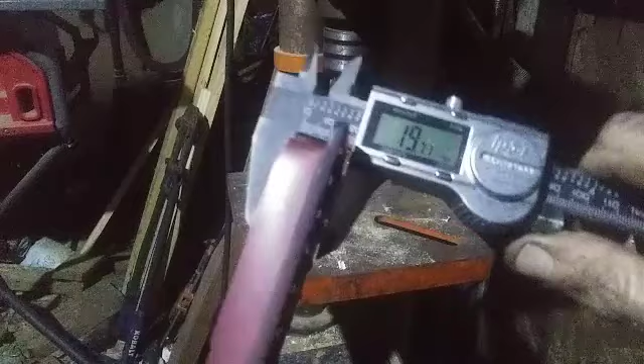So you go like this, and that gets you the thickness with the frets. And we're reading 19.71 right there. And then you go like this. See, I'm not on the frets now. And that gets you the thickness without the frets, and that's 19.67. Those are probably not real accurate measurements. You want to take real accurate measurements.

But let's say you're going to add 1 mil for the frets. If you're shooting for a 20 mil thick neck, then all you need to do is put your bit in. Pretend this is the other bit. You stick your bit in, then you measure from the bottom of the bit down to your plate here, and set it for 21 mil. And you just turn on the drill press and run this thing back and forth underneath it until you've done this. You don't need the sled.

And then you take that bit out, you put this bit in, the 45 bevel bit, you adjust it so... tired of stooping over for this camera. Alright, yeah. So you take it and you adjust it so

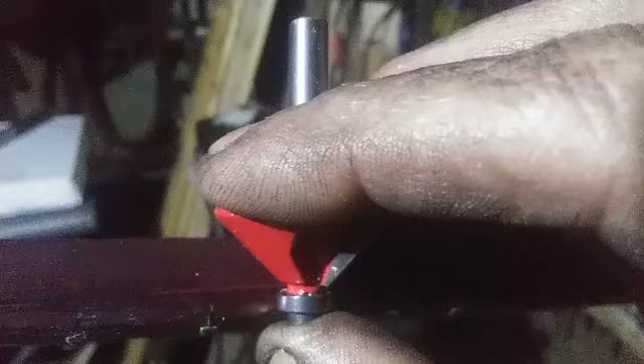the top of the bearing is right at the line there, and you might actually need to move it down a little bit, but someplace right about there is going to be the proper depth adjustment to get this thing to ride on the edge of the fingerboard and get you a 45 bevel cut along the back of the neck between the heel and the nut, and shape all this for you basically. Probably good enough to be ready to sand.

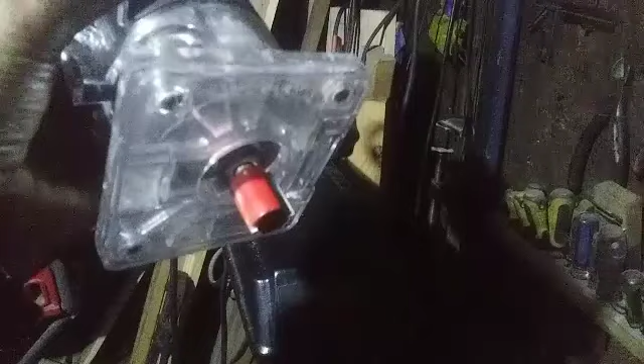So yeah, you would start by running it through the drill press with one of these kind of guys in order to thickness it, and then you'd run it through the drill press with one of these kind of guys in order to profile it. And so I'm going to try that next.

Okay, I've marked out the neck with the spine all the way down, and the triangular heel, and where the screw hole should be, as opposed to where they used to be on the X-5, which is like 3 years ago, before I came up with any kind of standards. And so now we can actually see if the light is going to behave.

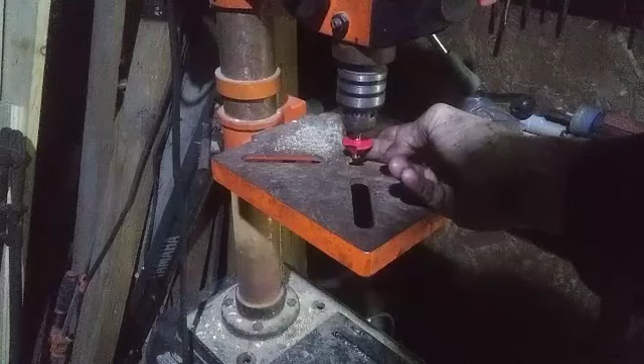Yeah, now we can actually see where there's still material to be removed. And as you can see, there's a fair amount in here at the shoulder areas still. So, but I've also set up the drill press here with the 45 bevel router bit, following router bit with the little bearing on the bottom.

And I've already adjusted the table height and locked it down to follow right along the edge of the fretboard with the bearing, and to start cutting just above the edge of the fretboard or right at the edge of the fretboard. That's the tricky part, because see, if you tilt or wiggle this thing a little bit while you're doing this, then if you tilt it like that way, you're actually going to start cutting into the bottom edge of the fretboard a little bit probably. So you got to be careful and slow with this process probably.

But just kind of sliding it along with the power off as a dry run test to check it out, it looks like it'll be, I don't know, somewhere down here before it really starts to actually have any effect, I think. So, but I'm going to give this a shot. And I think I already mentioned this in a previous clip, but if you take this bit and use it instead of that and adjust the table to the proper height, you don't even need this thing.

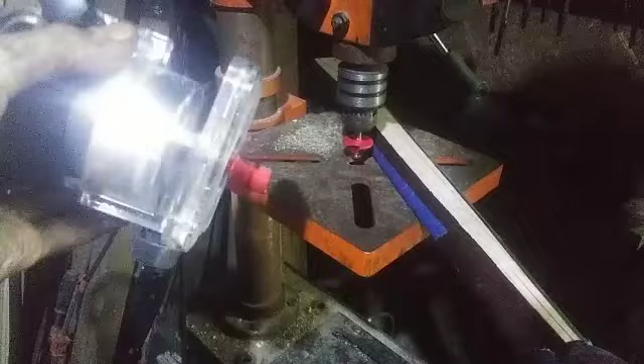So yeah, I would have to say that going forward, using the drill press and using a bit like this, they make nice big ones that you'd be able to do a whole neck in like one pass kind of thing. Use a bit like that in order to thin it down to 20, and then use a bit like this in order to get the profile. Might be the way to go. We'll see how this goes.

All I gotta do is, I've got this plugged into the generator. All the big gear gets plugged into the generator and run off the generator. Always, they drain batteries way too fast. Induction motors. So yeah, let me go fire up the generator and we'll see what happens.

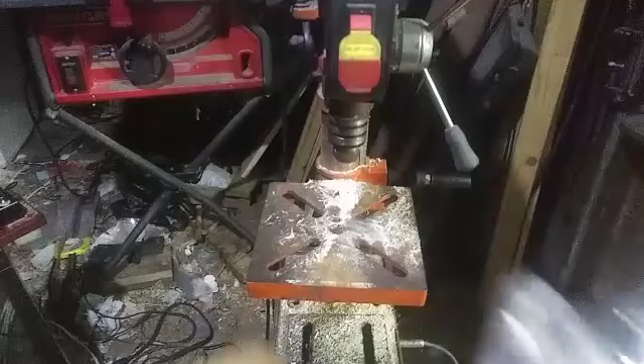Well, I think I'd have to say that it works, but it's not really fast or easy, and also this isn't 45. These cuts are 45-degree angle, but the angle, if you go from here to here, is not 45 degrees. It's something less than 45. So in a router bit, you would need something like a 60-degree router bit, maybe. You'd have to do part of it. Up here, that's where the neck is actually 45. And then here, it requires a larger angle router bit, 60, something like that, maybe, the rest of the way.

So, yeah, looks like angle grinder and a 40 grit flapper disc, sanding disc, is going to be the way to shape this thing, I'd say. And you just go from about here down to maybe there, and that's it. So yeah, at this point, this thing only needs like one swipe right here and a couple swipes right in there and there, and it's ready to go for shaping with the Shinto rasp.

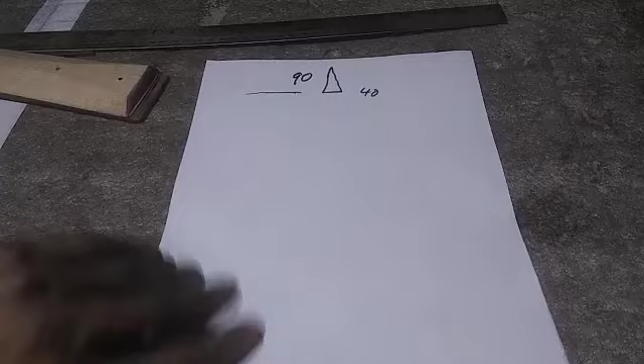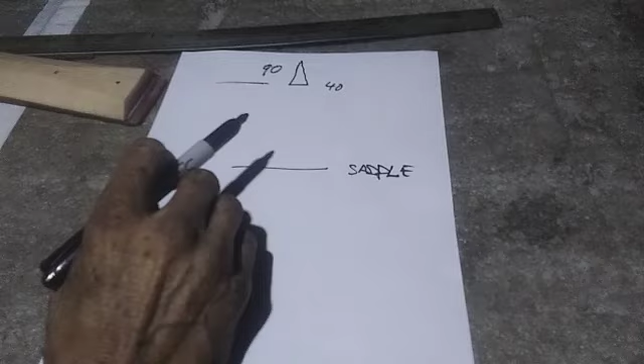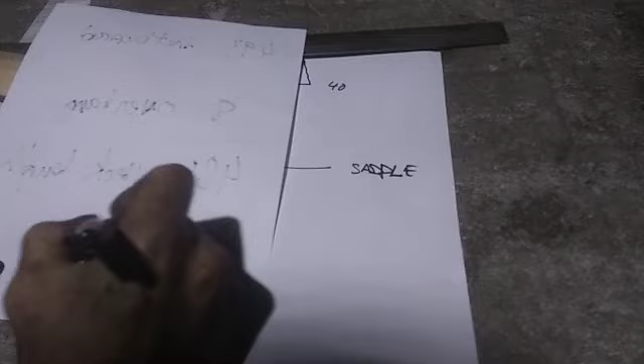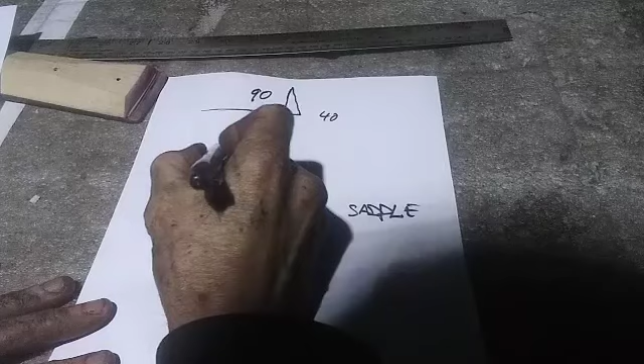So here's our triangular heel, and it's going to be 40 wide and 90 long. And this is where the end of the neck is. So down here is going to be our saddle line. And the saddle, it's a Fender scale length, so we're 648 from the nut all the way up here to the saddle line. And we know that the neck down to here is 485 already. So 648 minus 485. You crunch that on a calculator or whatever. And survey says this distance is 163, from the end of the neck to the saddle line.

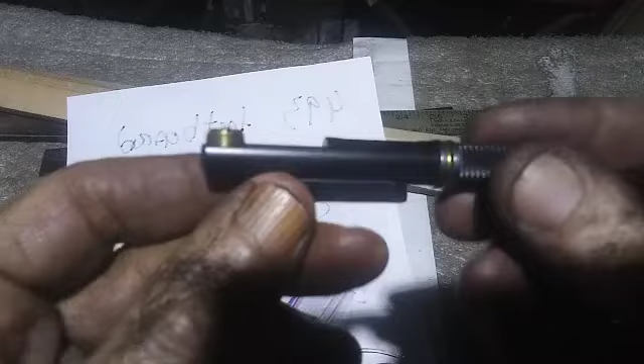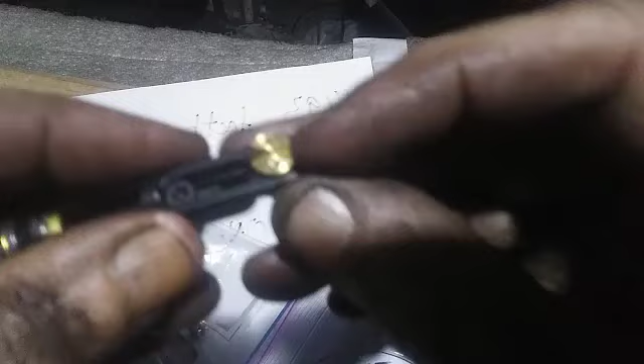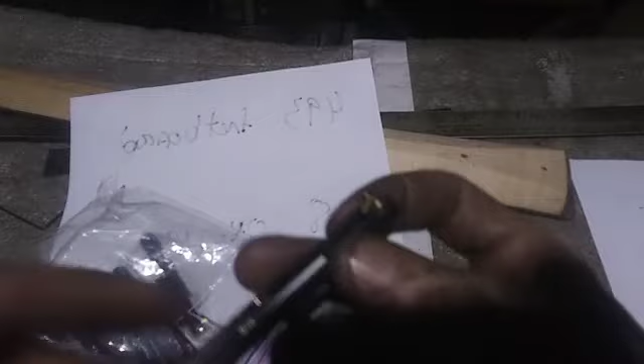So, taking a look at a barrel tuner here, I was thinking this actually screwed in and you would rotate it in order to adjust the height up and down, but it's got a lock grub screw there, and it's not threaded, it's just a post. And it actually has little miniature grub screws here to raise and lower it like it was a Fender saddle, with a little Allen. So that's how you get your height adjustment on the saddles. And this one down here unlocks it from the base so it'll slide back and forth for your intonation. And it's currently in the all-way forward position.

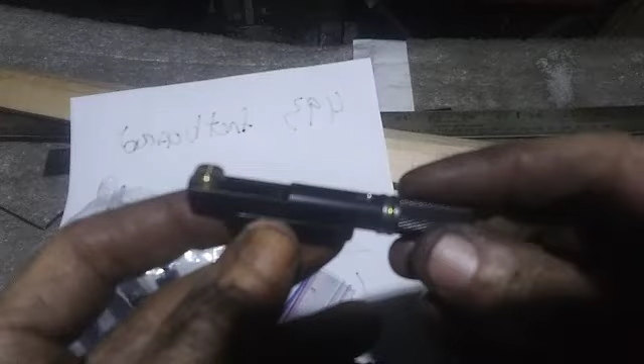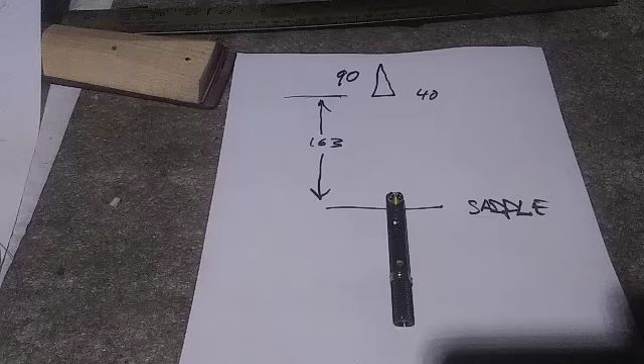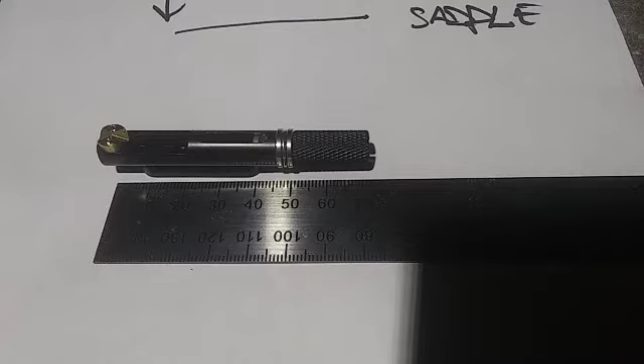And looking at the saddle in general, if this is your saddle line right here, and you start with your guys all the way forward, then you're going to need wood back enough to mount these two holes on the base. So I'm thinking from the saddle line, you want wood back to about where the knobs start. So we're looking at something kind of like this. Here would be our saddle line, and there's our saddle. And so our wood's going to extend from the saddle line back to there. Let's get a measurement. Survey says 50 millimeters. So we're going to come down another 50, which would be about a third of this. And that'll be the end of the guitar.

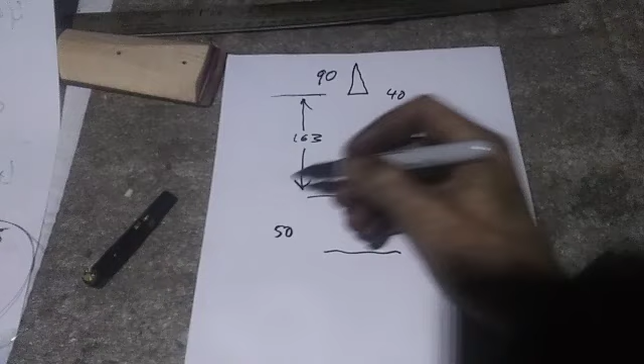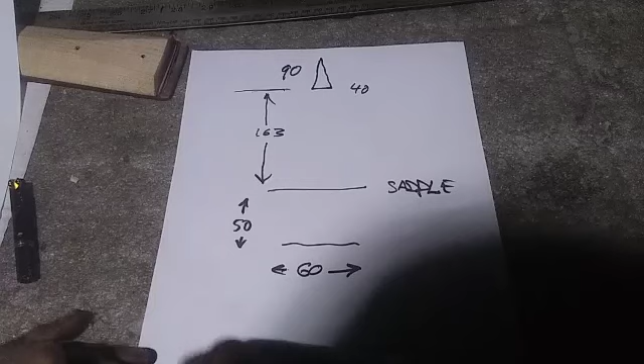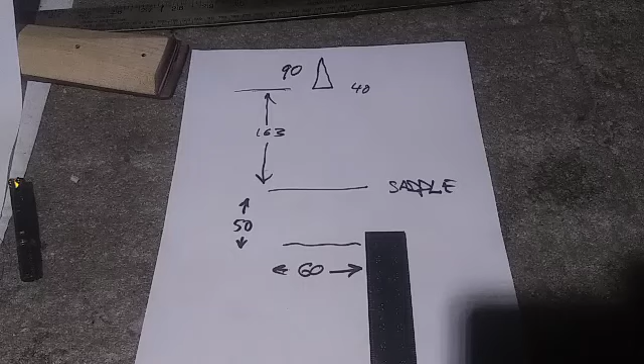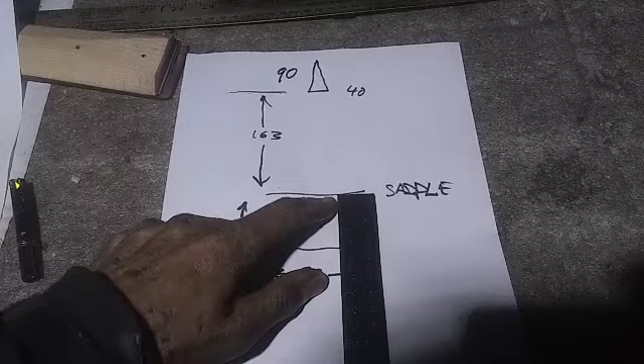And these things are designed for 10 millimeter spacing. So our bridge, quote unquote, will be 60 millimeters wide. So we need 60 wide for the saddles down here. Okay, and then you're going to need the bar down on the right side that lets you mount the EQ and the control panel, and also serves as the right hand portion of the leg cutout, you might say. This bar down here and then the swing bar form the leg cutout. And on an X-13, the length of this bar here is 200 millimeters from the saddle line to the end of the bar. And so that's probably a pretty good length to work with here as well.

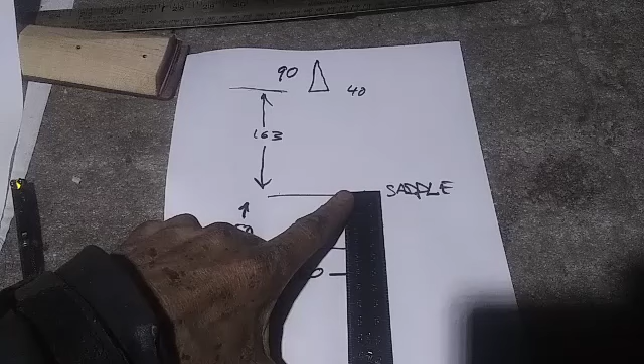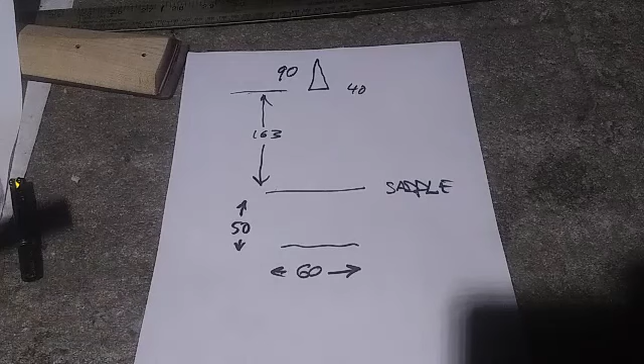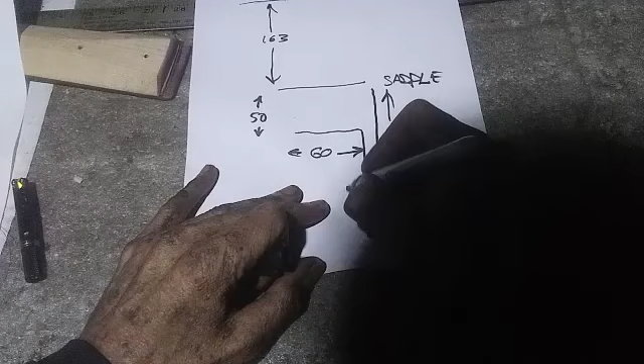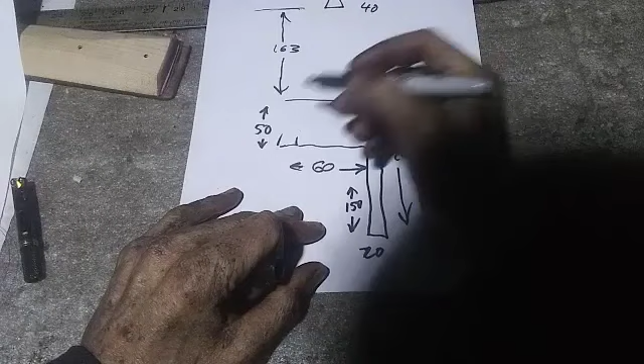And then the bar is like 20 millimeters wide. So we'd have 60 millimeters here, and then we've got a bar coming down from the saddle line side. And that's going to be 20 wide. And this distance is going to be 200. So that's 50, so this is 150. And then that's 20 wide, so that's 20 wide. If we make it symmetric, then we add another 20 here, which makes this whole thing 100 wide.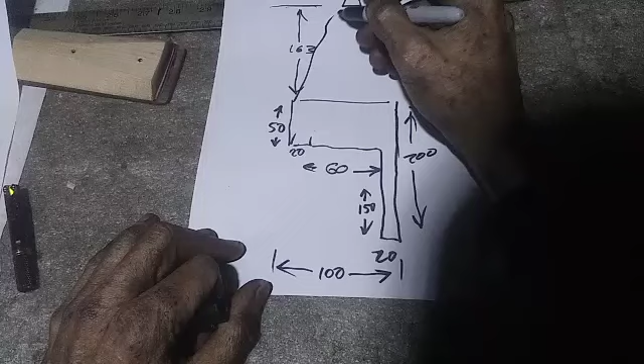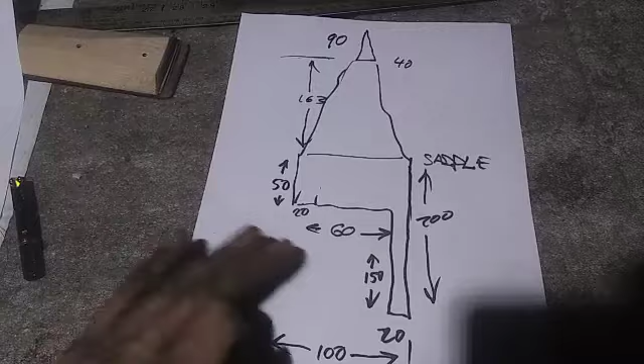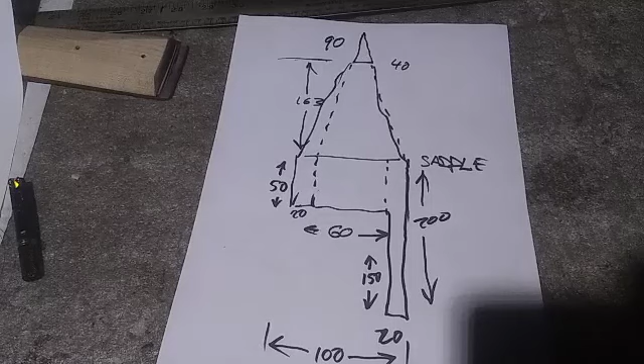So you're like 100 wide here, and you connect the dots. Now, do we go 100 wide and keep it symmetric, or do you just go 60 wide here, or, I mean, the other way to do it would be you make it asymmetric. You've got 60 like that, and then you have this side comes like this, and this side comes all the way out like this. It would be the other way to do it. That would make the whole guitar only 80 wide.

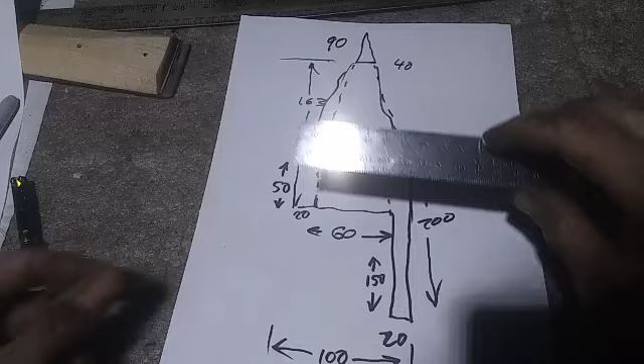Where are we at here? 80. That's rather narrow versus 100, which still isn't bad. Maybe I should make scale drawings of both to see which one looks better.

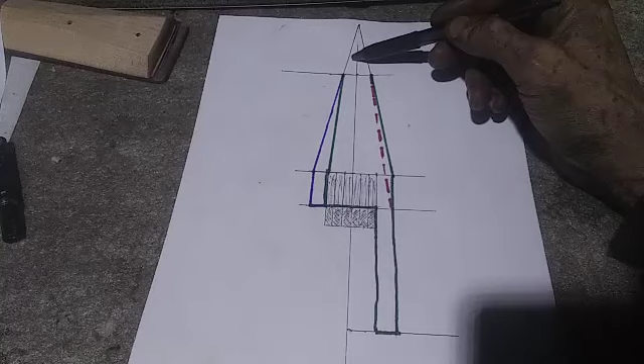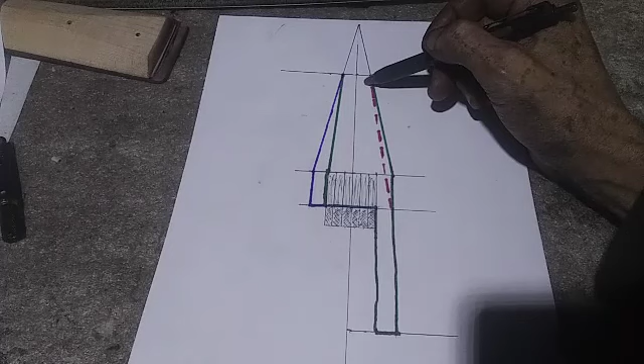So here are a couple different options. We got our triangular head here. This is a 1/2 size scale drawing. Got our triangular head up here. These are the tuners here. Those are the knobs. So at the very minimum, you're going to need like what's here on this green line. Then this is the bar back here. And then you'd need this dashed red line. And that actually I think is the sleekest shape and the one that I'm probably going to go for.

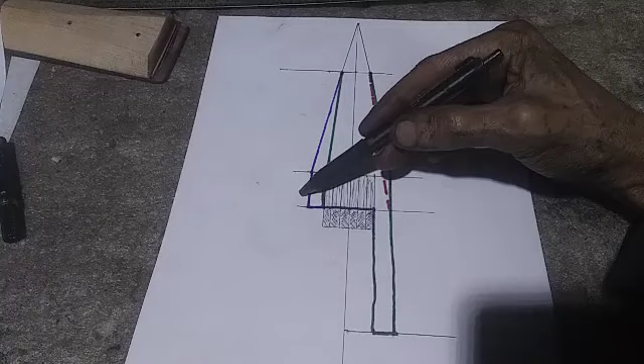Other options, you could carry this out to be 20 mil wide all the way to the front of the top of the tuners, and that would be this outside green line. Or you could do the same thing on both sides, and that'd be this outside blue line. You could even go like that and then bring this back like that, which would also look kind of slick. But I think the green line on this side and the dashed red line on that side and the bar, which is the absolute minimum, is what I'm going to do.

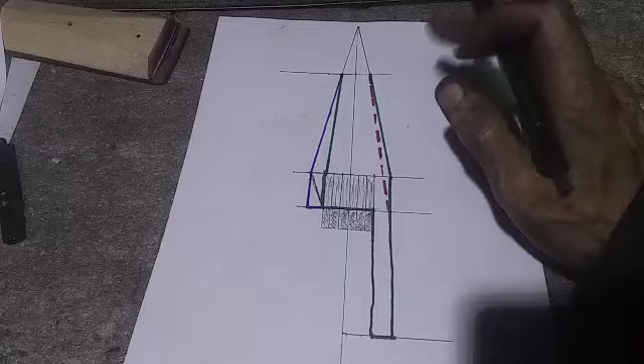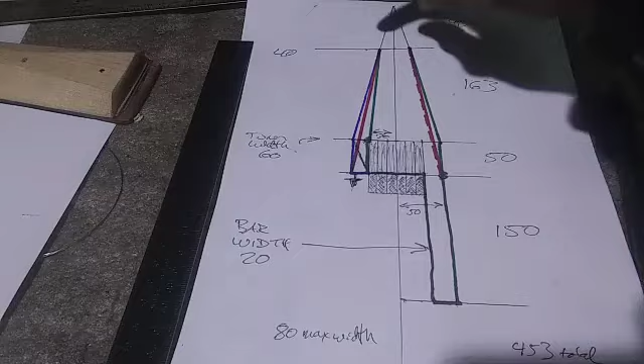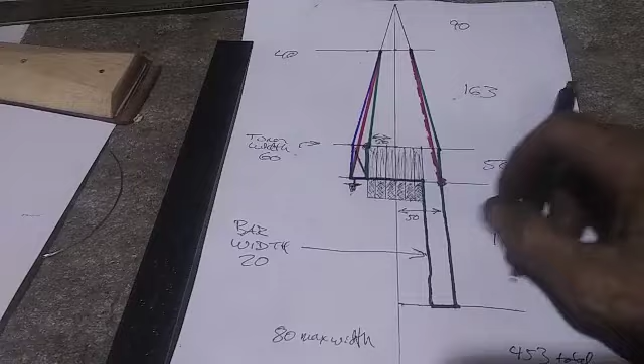Change of plan. Forgot a strap lock, so you need 20 mil wider than the tuners on this side for the bar, and you need about 20 mil wider than the tuners on this side for the strap lock. So just make it 20 wide at the back. That'll definitely clear the front if you just run a line straight from the triangular heel all the way back to the back of the tuners where the end of the body is there. And so yeah, I think the red lines is the way to go. Red lines plus the green bar down here. Keep it simple, right?

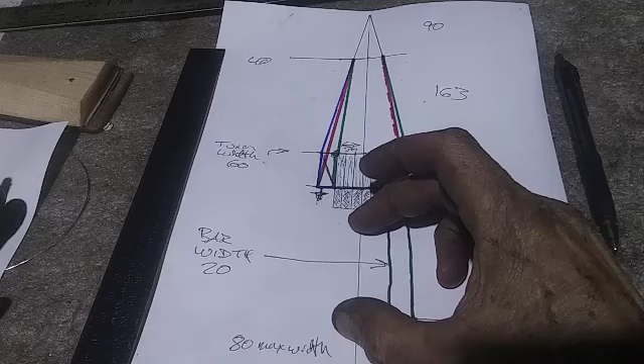I was thinking ahead about controls and control panels and stuff. It's only going to have 6 mini toggles on it, so hopefully that won't be too intense in the way of a control panel. And I don't want to get into a second bar here because A, it complicates things, and B, it could get in the way of access to the tuners here.

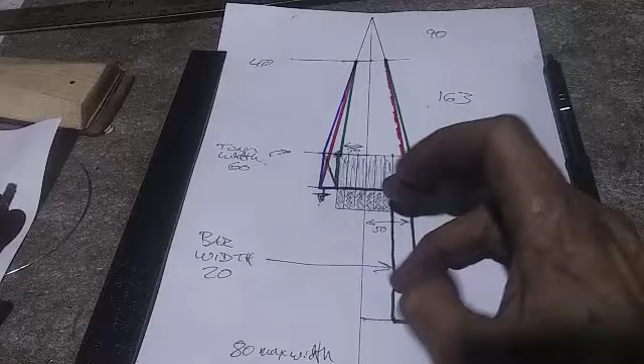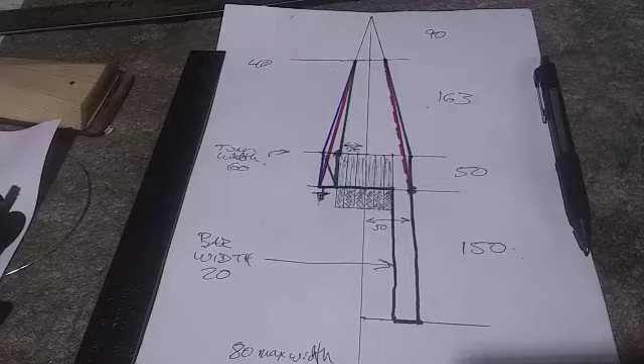So if 6 minis here seems to be an issue, I can always put a back cover plate on it that goes on with pickguard screws, and then mount the battery box to the back cover plate. And then you could remove the back cover plate in order to access the electronics, and when it was installed, it would protect the electronics from behind, and you can still see your cool electronics from the side.

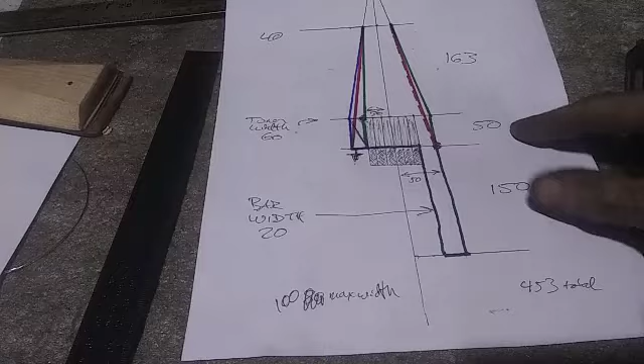So that means we're going to need a 100 millimeter wide body blank, not an 80. And I added up. You got 90 for the heel, 163 is our magic number from the heel to the saddle line, and then we got an extra 50 for the tuners and 150 for what's left of the bar past the tuners. And it adds up to 453 total. So you need a 453 by 100 body blank.

Okay, I found some wood of the appropriate width. It was either this or red oak, and this is clear New Zealand pine. And this is going to be much easier to work than red oak would be, so I'm going to go with this. There was also knotty pine to choose from, but I figured I'd use the last of the clear. And everything else was either not wide enough to get both a body and a swing bar out of, or it was much wider than I need.

So, you know, this is a 1x6, and the cedar's 1x8, and everything else is like 1x12, so this looks like the best choice for the least amount of wastage. And there's absolutely nothing wrong with pine. It's perfectly fine tone wood.

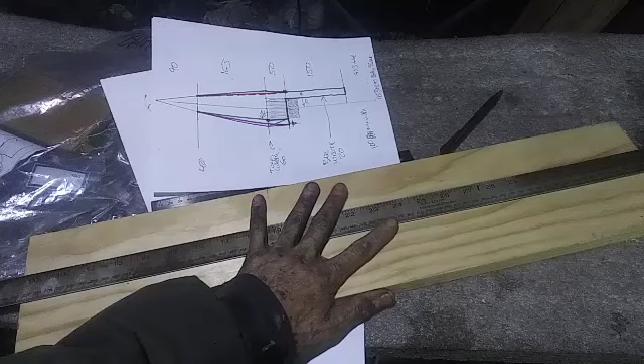So I have a body blank, and the next step is to mark it out. Basically I'm going to draw a center line and then transfer this full scale over onto the wood, and then I'll be ready to have at it with, I don't know, circular saw, jigsaw, whatever. And yeah, so I'll be back once I finish marking it out.